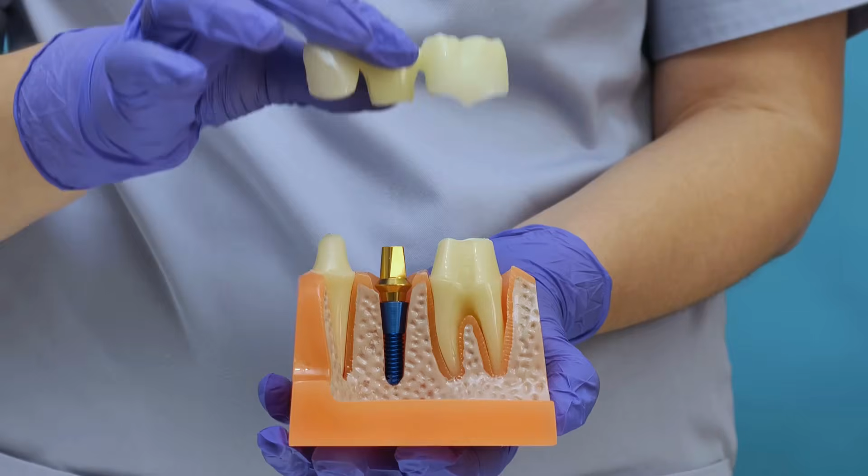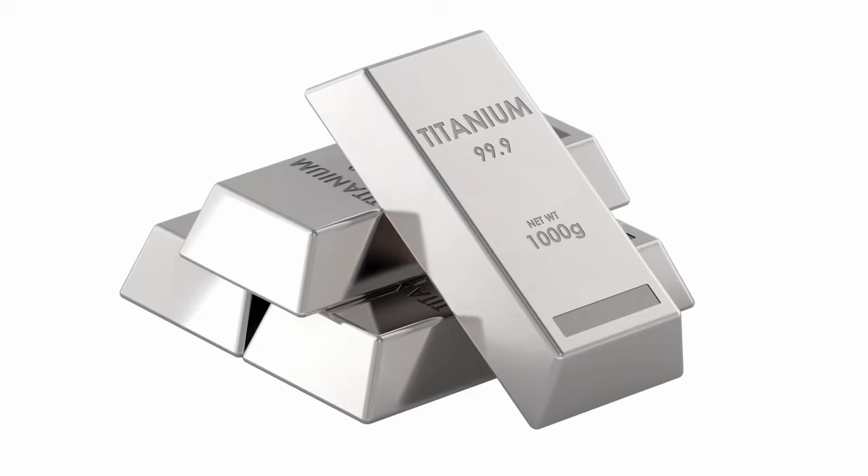Have you ever stopped to wonder what keeps a jet engine running at temperatures that would melt ordinary steel? Or what allows a surgeon to place a metal implant inside the human body and have the body simply accept it, as if it were always meant to be there? What if the same material doing both of those things was also quietly sitting on your bathroom shelf every single morning? That material is titanium, a light yet extremely strong metal.

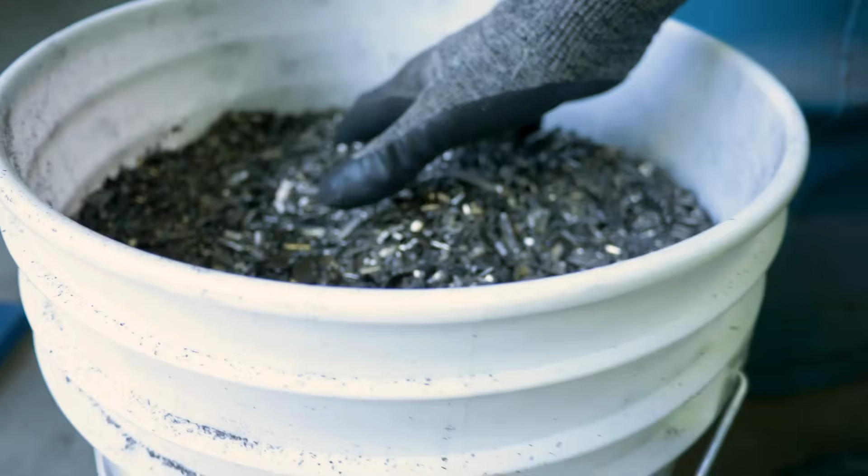Today, titanium is everywhere: in spacecraft, airplanes, submarines, medical tools, bicycles, watches, and even in toothpaste and sunscreen. Yet, beneath its everyday presence lies a remarkable story of discovery, challenge, and innovation. How did this extraordinary metal transform from unnoticed grains of sand into a cornerstone of modern technology? Let's explore the surprising journey behind titanium's history and production.

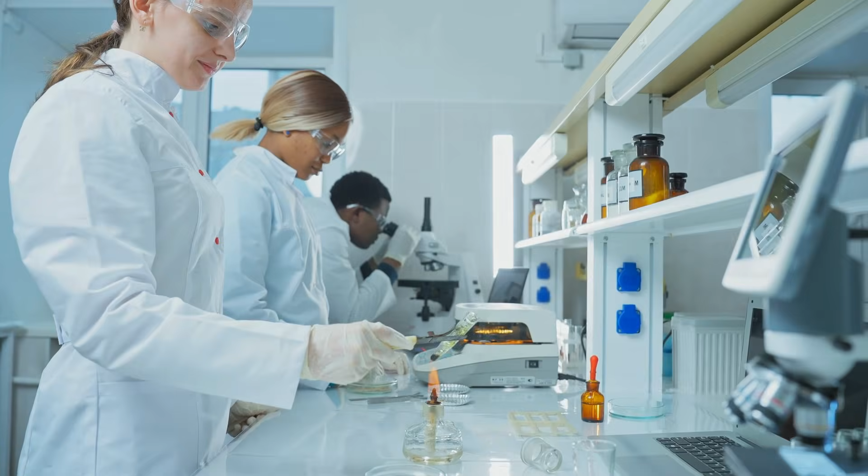Our story begins not in a gleaming laboratory, but on a quiet riverbank in Cornwall, England, in the year 1791. A clergyman and amateur scientist named William Gregor was examining black sand near a local stream when something stopped him. The sand was unusually heavy, faintly magnetic, and chemically unlike anything he had encountered before. After careful analysis, he concluded it contained traces of an entirely unknown element. He named it Manaccanite, after his village of Manaccan, and then the world moved on without caring.

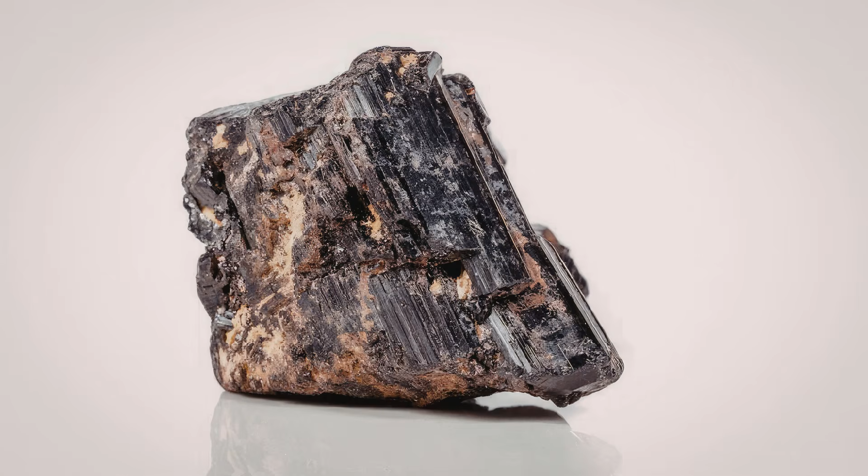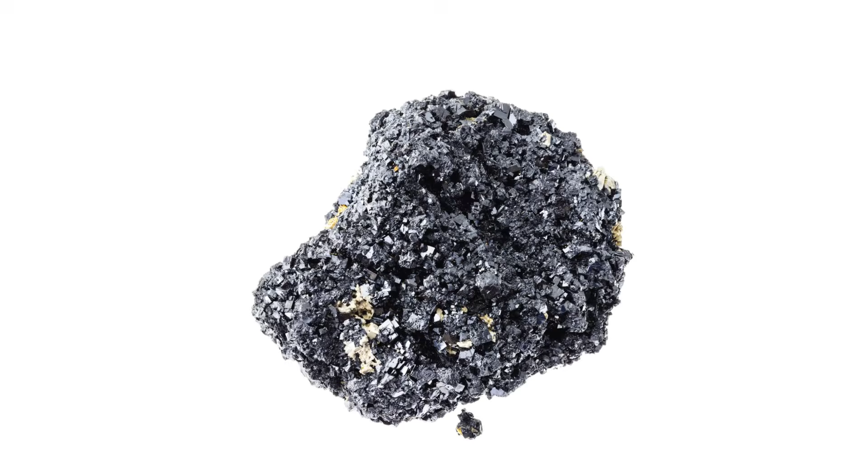A few years later, in 1795, German chemist Martin Heinrich Klaproth independently rediscovered the same element. He gave it a more powerful name, titanium, after the Titans of Greek mythology, the giants of extraordinary, unstoppable strength. It was a fitting name, but for more than a century, titanium was nothing more than a promise locked inside a rock. Every time scientists tried to extract it in pure form, it reacted instantly with oxygen when heated, turning brittle, crumbly, and completely useless.

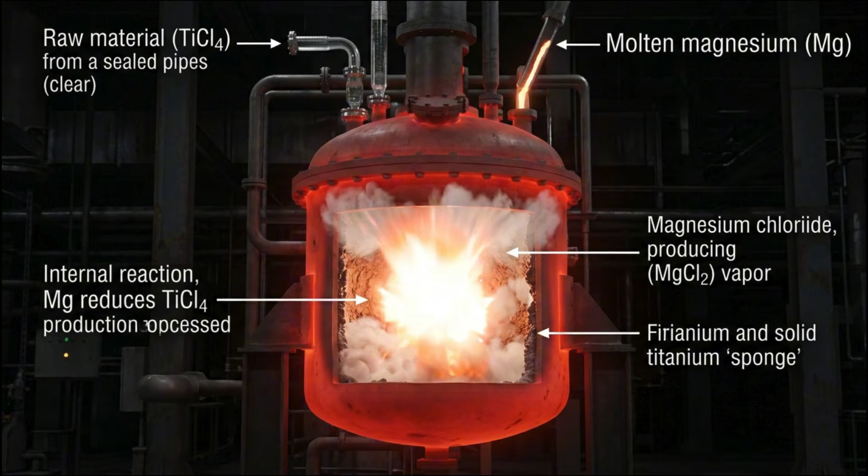It wasn't until the late 1930s and 1940s that a Luxembourg-born metallurgist named William Justin Kroll finally cracked the problem. Working in the United States, Kroll developed a method using magnesium inside a completely sealed, airtight chamber, keeping the enemy, oxygen, entirely out. The result was pure, usable titanium, produced reliably and at scale. By 1947, just 2 tons had been produced. By 1953, annual production had reached 2 million pounds. The sleeping giant of metals was awake at last.

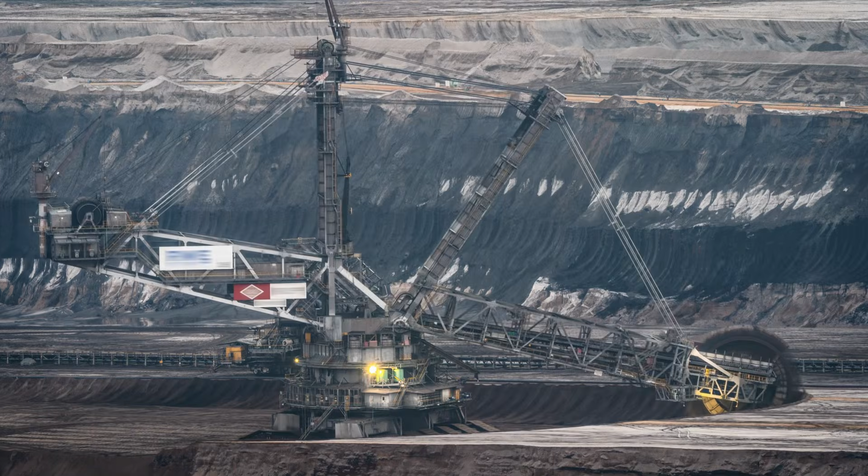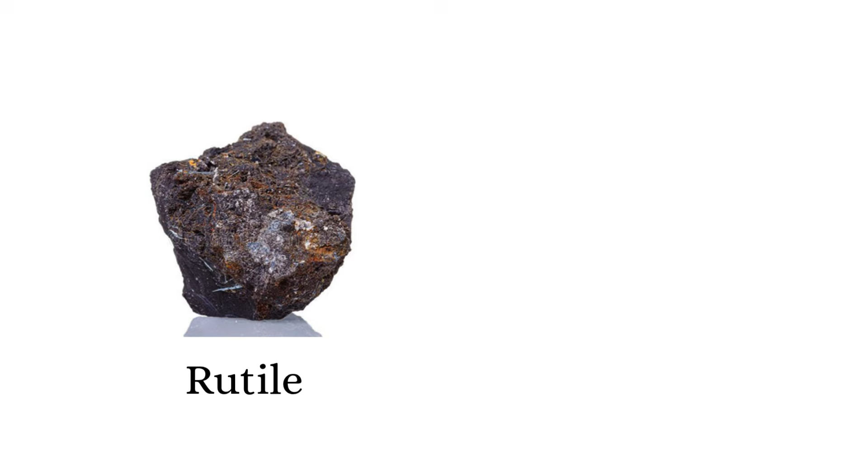So how exactly does a handful of black sand become one of the most prized metals on Earth? The process is as dramatic as the metal itself. It begins in open-pit mines, primarily in countries like Australia, South Africa, Mozambique, and China, which today produce nearly 70% of the world's titanium mineral concentrates. Miners extract rock and sand containing 2 key minerals, rutile and ilmenite. They look completely unremarkable, but deep inside them, titanium is locked up tight. The first step is to break that lock.

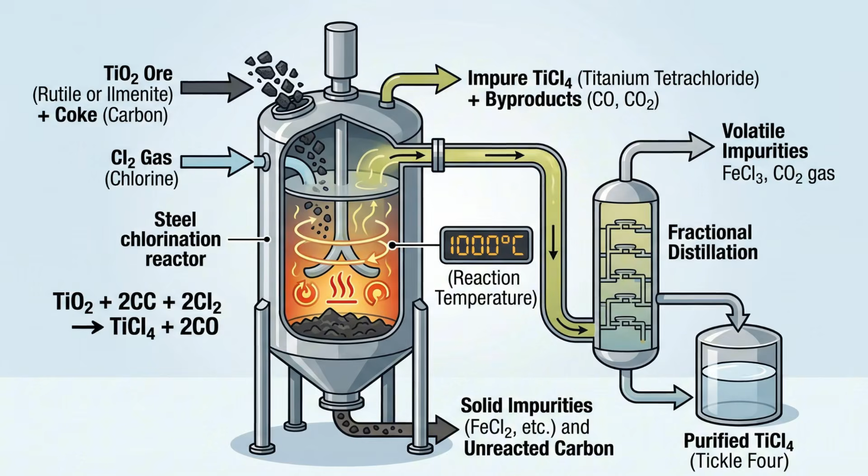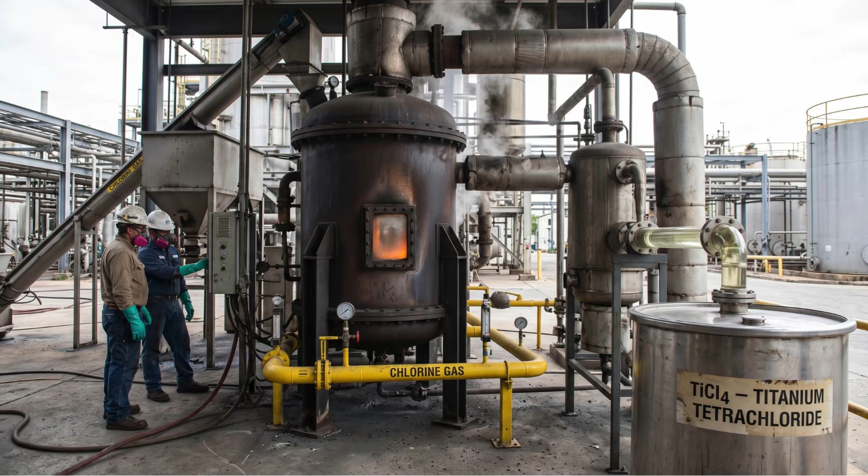The ore is mixed with chlorine gas and carbon, then heated to around 1,000 degrees Celsius inside a reactor. At that temperature, the chlorine reacts with the titanium in the ore, pulling it away from the surrounding rock and forming a clear, highly reactive liquid called titanium tetrachloride, nicknamed Tickle 4 by those who work with it. Impurities like iron are left behind as solids, and the liquid is then carefully distilled to achieve purity.

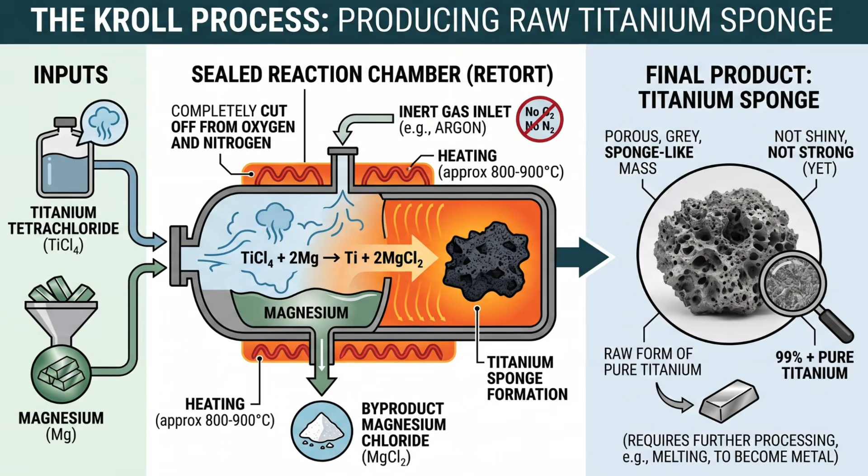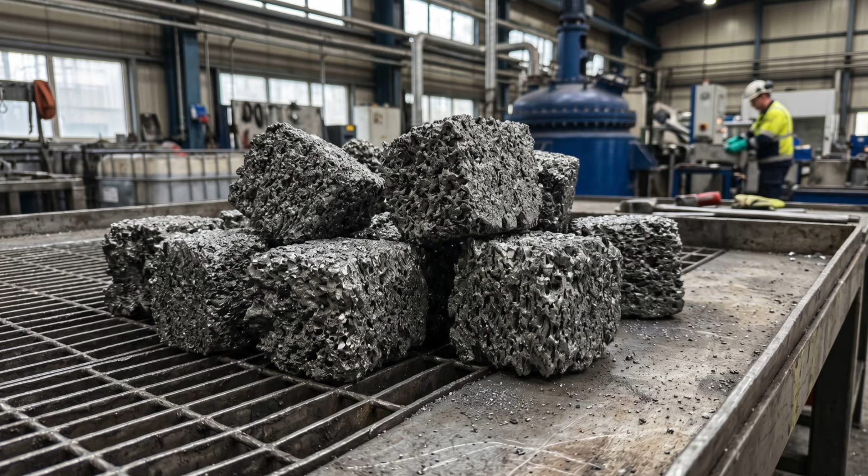Next comes the Kroll process itself. The titanium tetrachloride is heated with magnesium inside a sealed chamber, completely cut off from oxygen and nitrogen. The magnesium strips the chlorine away, and what remains is something surprising: a porous, gray, sponge-like mass called titanium sponge. It looks nothing like the strong, shiny metal we recognize, but it is pure titanium in its raw form. From there, the sponge is compressed into blocks and loaded into massive vacuum furnaces, where it's melted at temperatures exceeding 3,000 degrees Fahrenheit using a method called vacuum arc remelting.

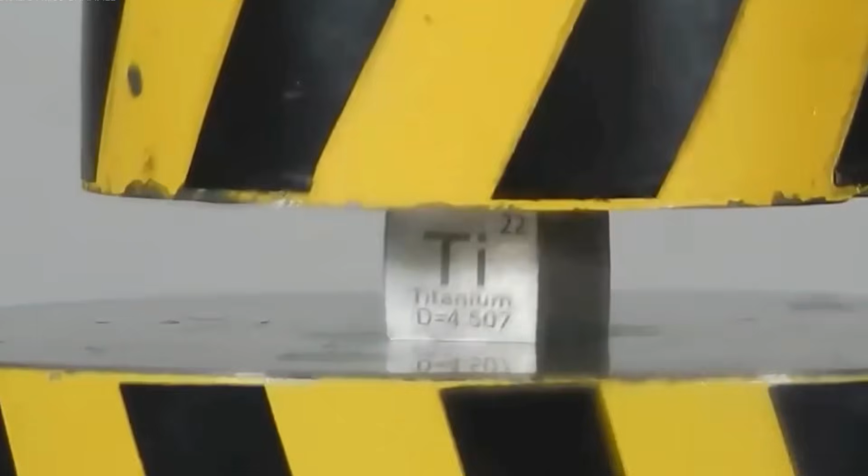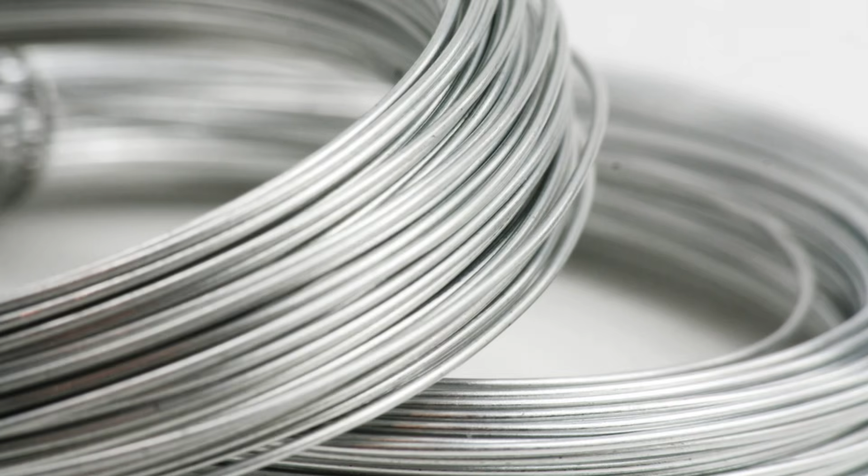Alloying elements, most commonly aluminum and vanadium, are added at this stage to tailor the metal's strength and performance. The molten titanium is then cast into large ingots, which are forged, rolled, and shaped into sheets, rods, tubes, and wires, the building blocks the world's industries depend on.

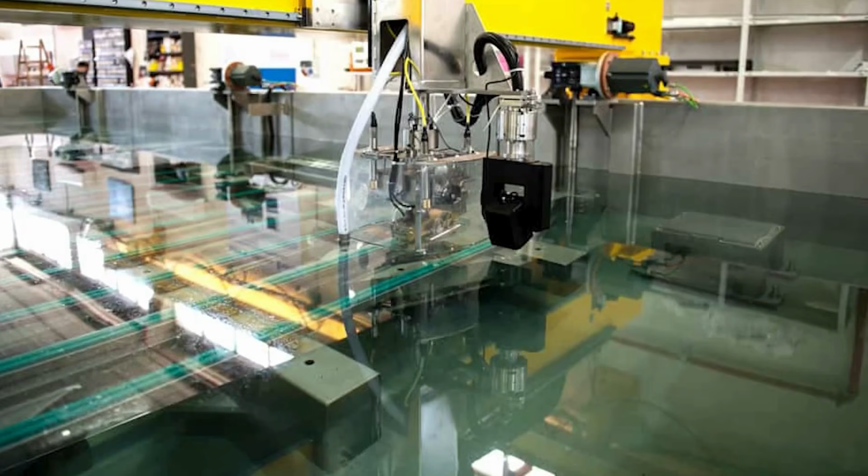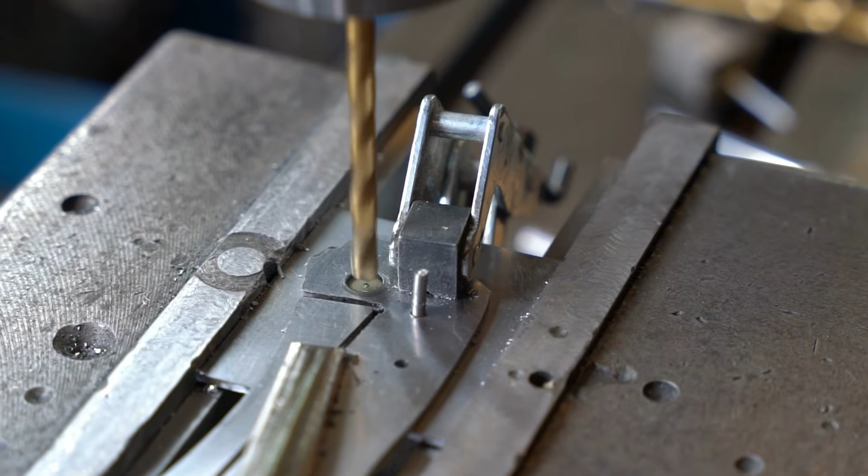Machining titanium, however, is a challenge of its own. Because of its low thermal conductivity, the heat generated during cutting doesn't escape through the metal the way it does with steel. Instead, it concentrates directly on the cutting tool, wearing it down rapidly. Special tools and carefully controlled techniques are required to drill, cut, or shape titanium without damaging either the metal or the machinery.

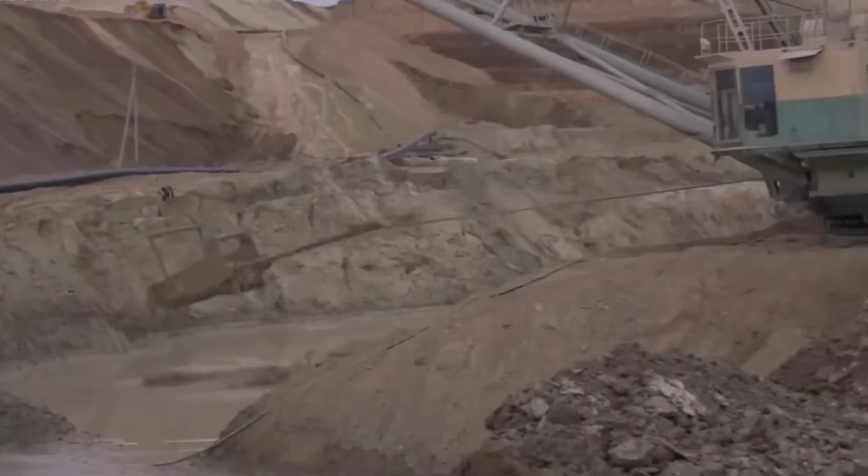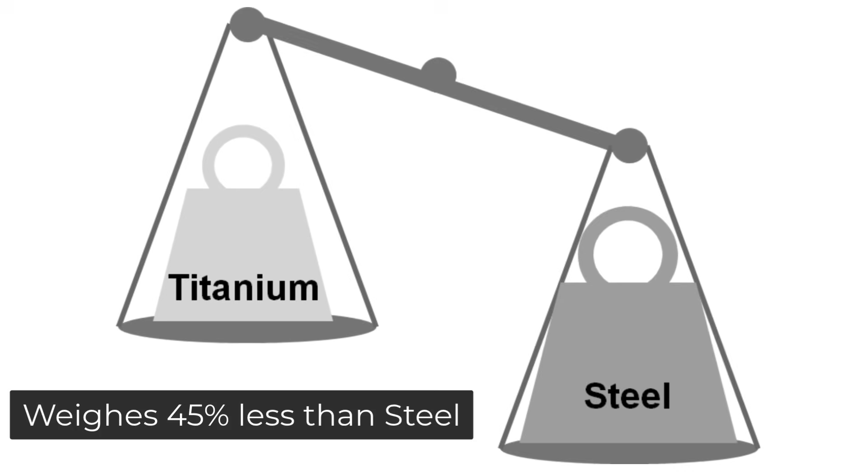So why go through all this trouble? Because titanium genuinely has no equal. It has nearly the same tensile strength as steel, but weighs about 45% less. For aerospace engineers, every kilogram saved on an aircraft translates directly into fuel saved across millions of flights, a difference that adds up to billions of dollars and enormous reductions in emissions.

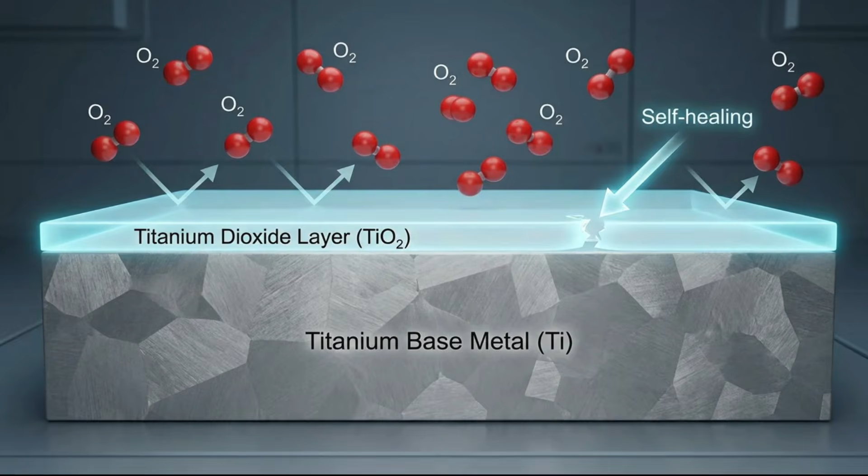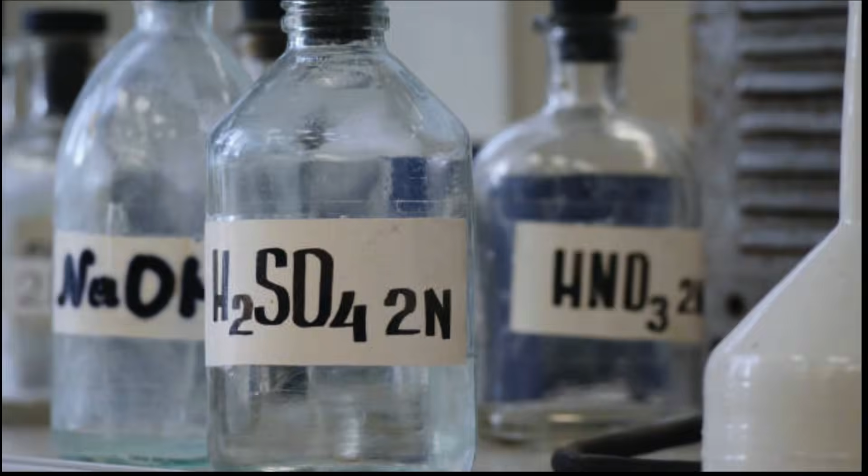Then there's corrosion resistance. The moment titanium is exposed to air, it forms a thin, invisible oxide layer on its surface that acts as permanent armor. Salt water, acids, and even the punishing environment of the open ocean barely affect it. That's why naval ships and submarines rely on titanium components where other metals would simply corrode away.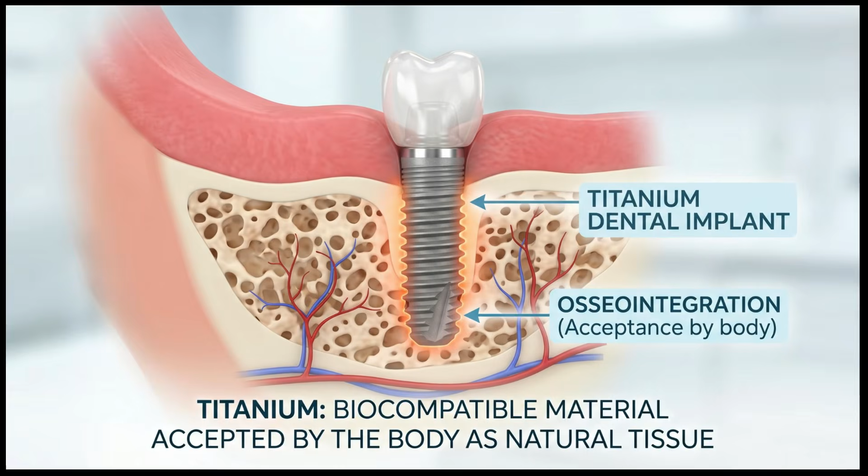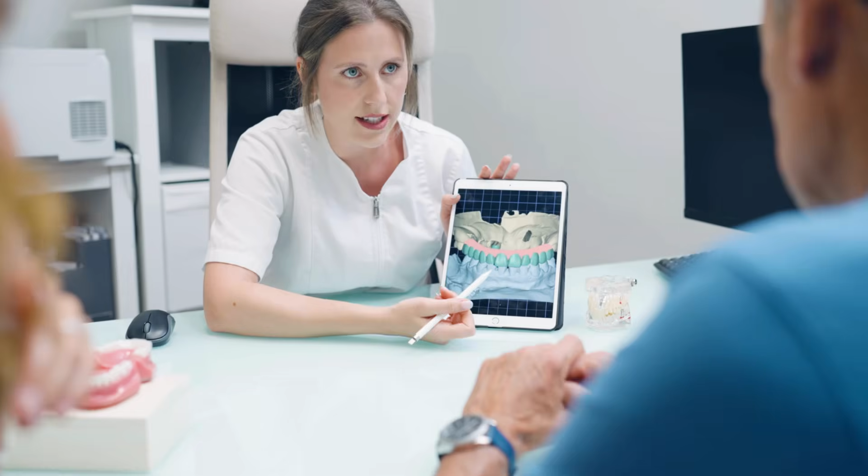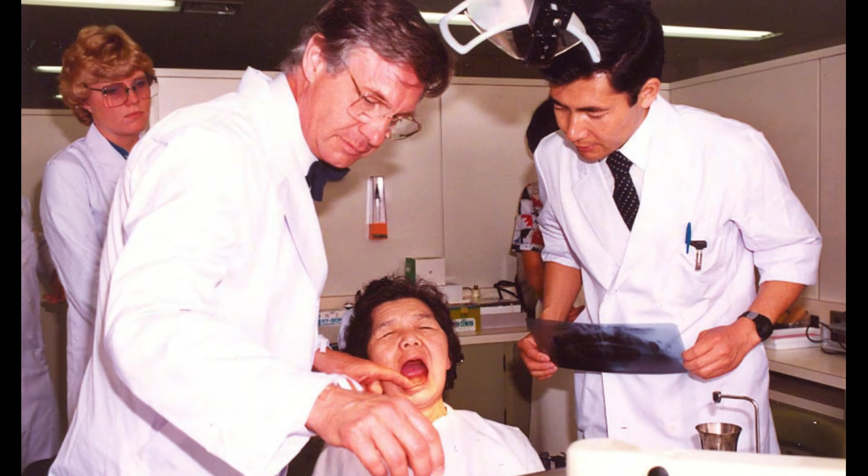Titanium is also biocompatible, meaning the human body accepts it as if it were natural tissue. Doctors use it for hip replacements, dental implants, pacemakers, and surgical instruments because it triggers no immune response, no allergic reaction, and no rejection. In 1965, Swedish physician Per-Ingvar Brånemark placed the world's first titanium dental implant, launching an industry that now serves millions of patients annually.

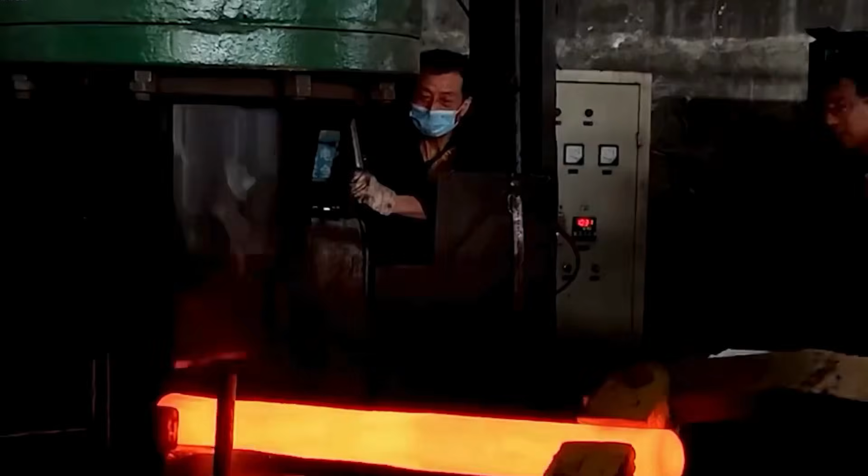And then there is heat resistance. Titanium can endure temperatures that would weaken or destroy most other metals, which is precisely what places it inside jet engines, one of the most extreme environments human engineering has ever created.

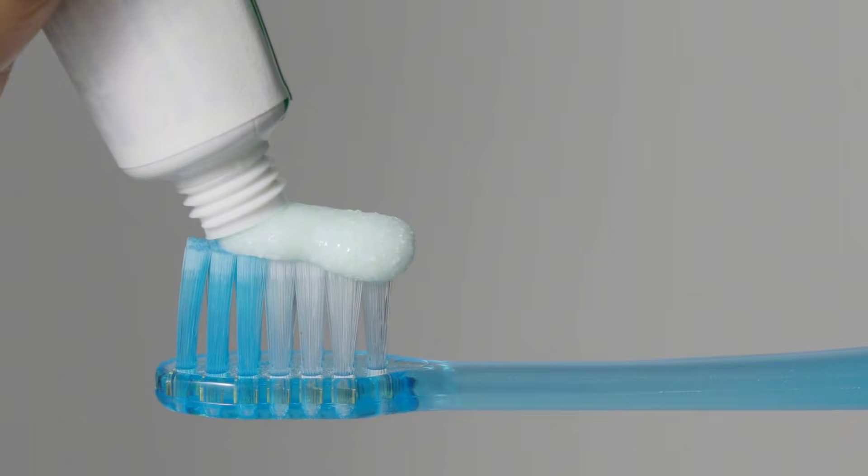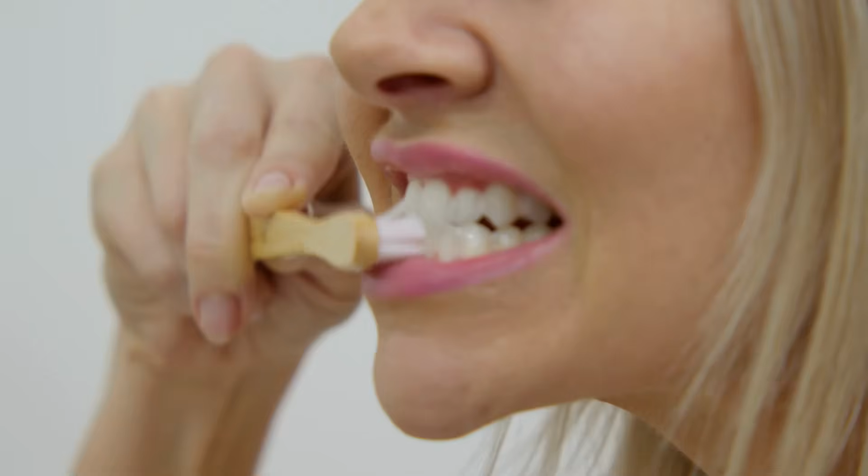Here is something most people never realize. Titanium isn't only in aircraft and operating theaters, it's in your bathroom. One of the compounds produced during titanium processing is titanium dioxide, a brilliant white powder that whitens your toothpaste, makes your sunscreen block UV rays, brightens the paint on your walls, and gives paper its crisp white color. Global titanium dioxide pigment production capacity reached nearly 9.8 million metric tons in 2024. The same chemical family powering spacecraft is quietly freshening your smile every morning.

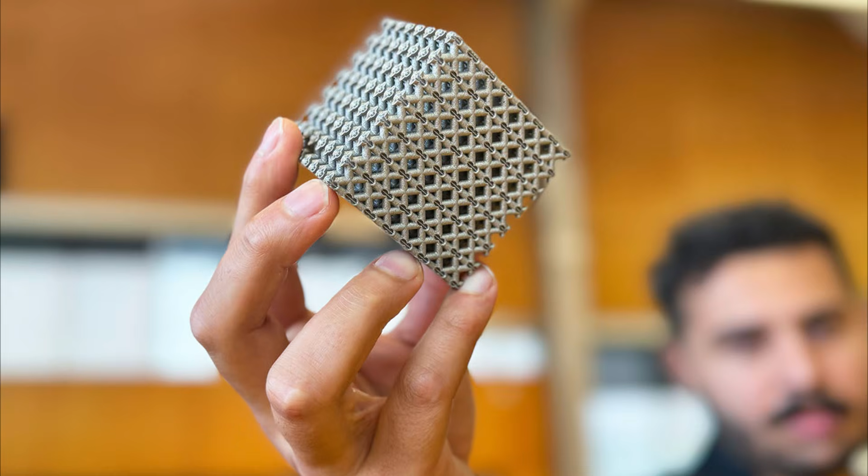Titanium's story is far from finished. Engineers at Australia's Royal Melbourne Institute of Technology have developed a new 3D printed titanium alloy that is roughly a third cheaper than the current industry standard by replacing costly vanadium with more accessible materials while actually increasing strength. At Johns Hopkins, researchers are using artificial intelligence to optimize the manufacturing of titanium parts, making the process faster and more precise than ever before.

And in February 2026, NASA's Jet Propulsion Laboratory successfully tested a 3D printed titanium spring aboard a commercial satellite in low Earth orbit, a sign of how rapidly this metal is evolving even beyond our atmosphere.

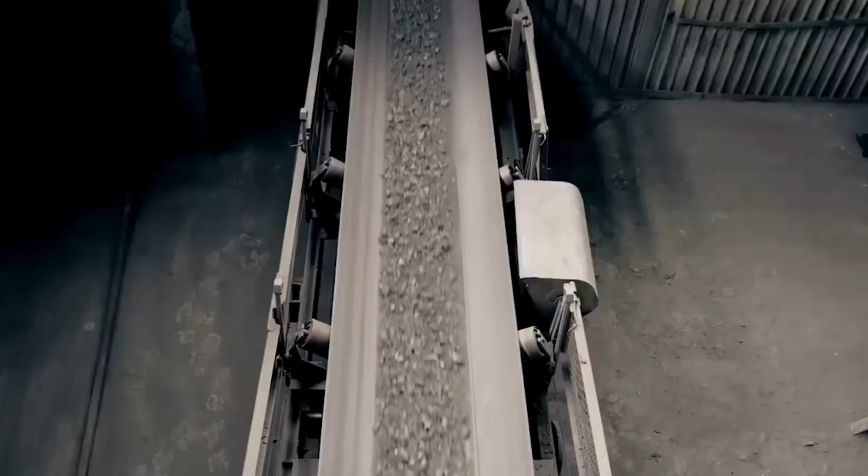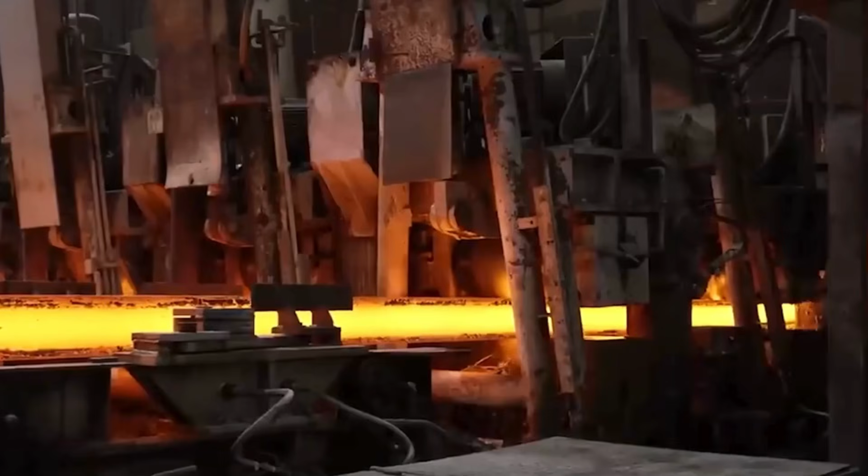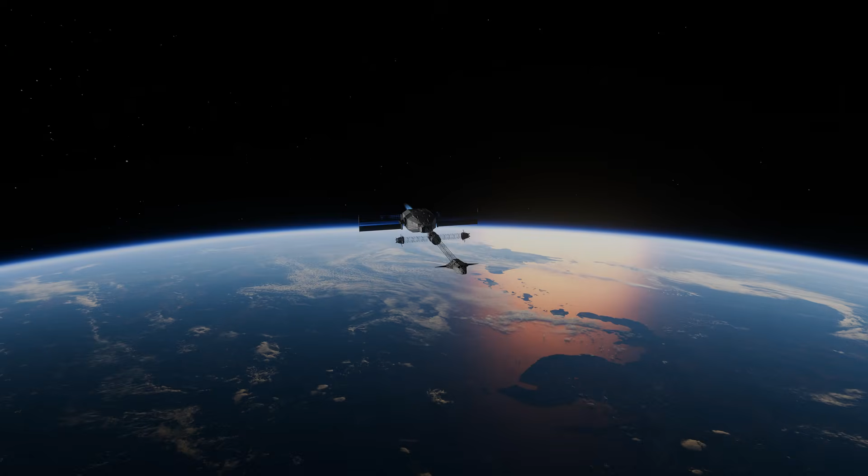Titanium began as a mystery in a handful of black sand, noticed by a curious clergyman who didn't even realize what he had found. It spent over a century taunting scientists who could see its potential but couldn't unlock it. And then, quietly, it changed the world. It flies in your aircraft. It lives inside human bodies. It orbits the Earth. And it sits on your bathroom shelf every morning.

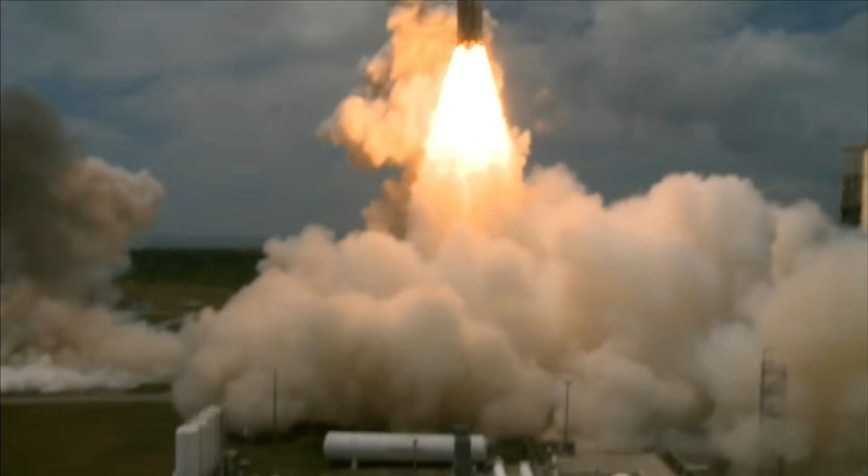The next time you brush your teeth, board a plane, or hear about a new spacecraft launch, take a moment to think about the metal named after giants, because in so many ways, it still is one.